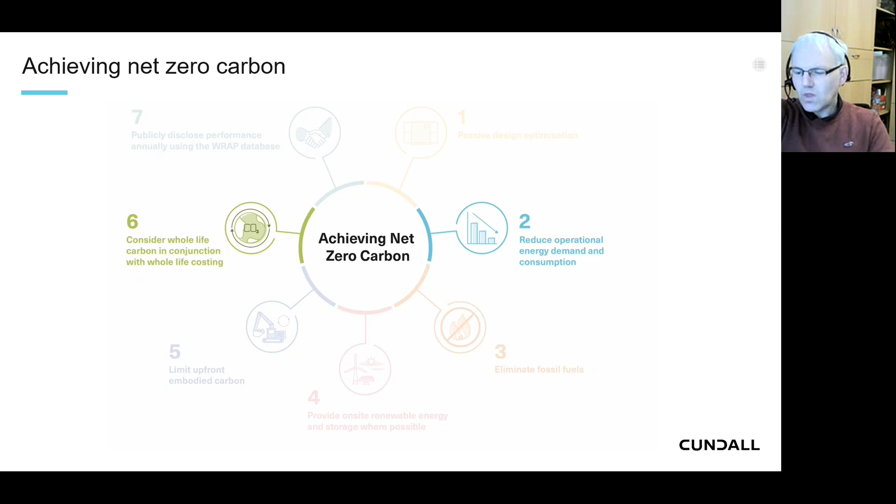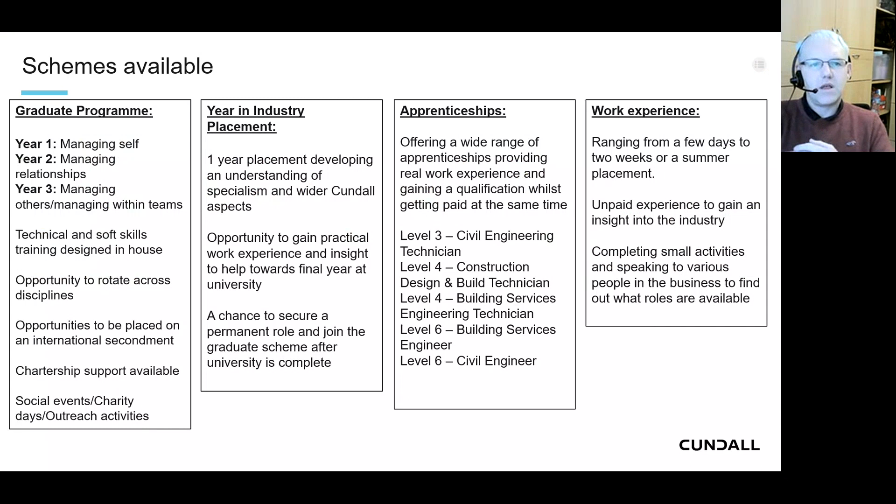As this is, I suppose, an opportunity to speak to some people that may be early in their careers, I just wanted to signpost you to a little bit of information about our early career schemes. So we operate graduate schemes, placements, apprentices, and work experience schemes. And if any of those are of interest, please do contact us through all the various channels. Our graduate applications go live in September of this year. We've currently got placement and apprenticeship processes ongoing at this moment in time. So if you think Cundall might be the place for you, please do reach out.

So the question really is, what is vertical transportation? Essentially it's quite a broad field, from lifts that help those in a wheelchair up 2 or 3 steps into a building, to the 10-meter-a-second lifts that take you up 300 plus meters in the Burj Khalifa, to great big industrial things that can lift massive weights, whether that be an HGV truck, a crane, or something similar.

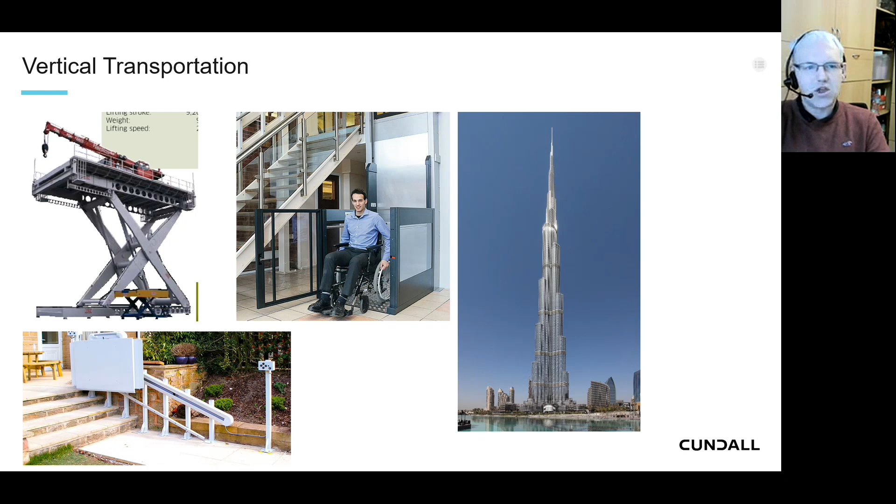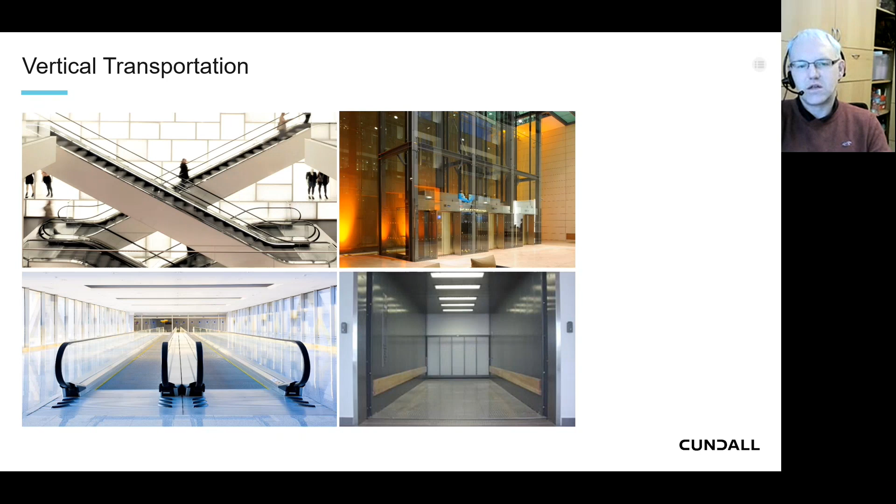But the main crux of it really is passenger lifts, goods lifts, escalators, and moving walkways or travelators.

So really, when we're involved in the vertical transportation field, we're often involved in the whole life of a building, from the initial conceptual planning stages through building design, working with other members of the design team, be that the other engineers, the architects, operators, through construction, and also in operation and maintenance of buildings and renewal and refurbishment. The typical lifespan of a building is around about 75 years.

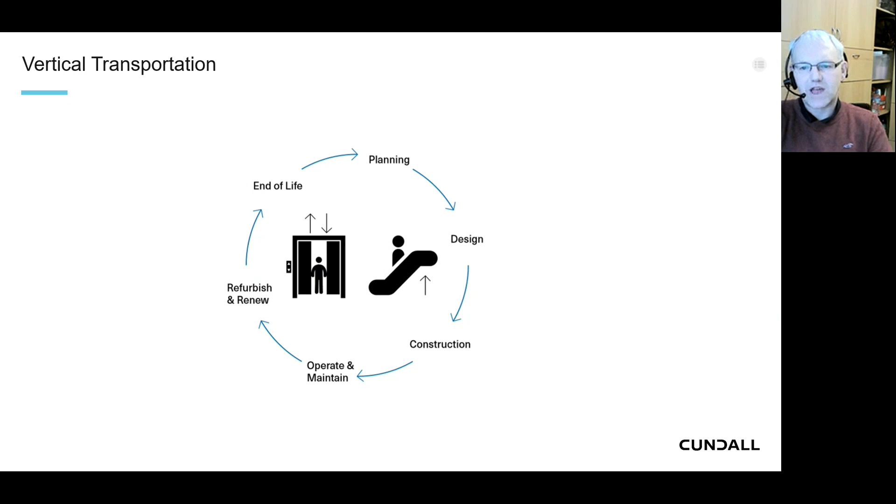Typical lifespan of vertical transportation equipment is normally around 20 to 25 years. So during the lifespan of a building, you tend to get at least 2 refurbishments of the vertical transportation assets just during the life of the building.

So looking at a little bit of terminology, because sometimes terminology can be confusing or misunderstood. Looking at a lift shaft in vertical section, there are 3 main areas that we talk about. The pit, which is the space below the bottom floor, typically something in the region of 1 meter to a couple of meters deep, and that's really related to the speed of the lift.

Then you have the travel, which is effectively from the lowest floor served to the highest floor served, the amount of distance that the lift actually travels vertically. And then above that top floor, there's a headroom space, which, dependent on design, will be something in the region of 3.5 to maybe 5.5 meters, and depending on the lift design, may have an amount of equipment within it or not, as we'll see in a couple of slides' time.

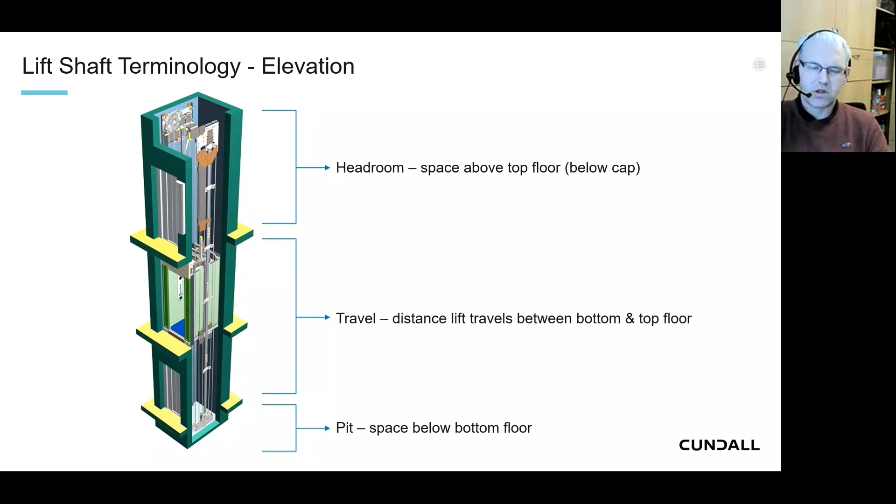Looking at things in plan, so over on the left, the lift shaft depth runs from the front wall to the rear wall. The lift shaft width runs from the left-hand side to the right-hand side wall, and it's amazing how many times in projects those dimensions get switched. So what's really important when looking at lift shaft design is that actually the depth and the width are in the right planes and in the right relationship to the doors.

You'll see there are a number of other key dimensions, but the one that I would always recommend people to keep an eye out for is that depth and width, and that it's in the right orientation to the doors when planning a building.

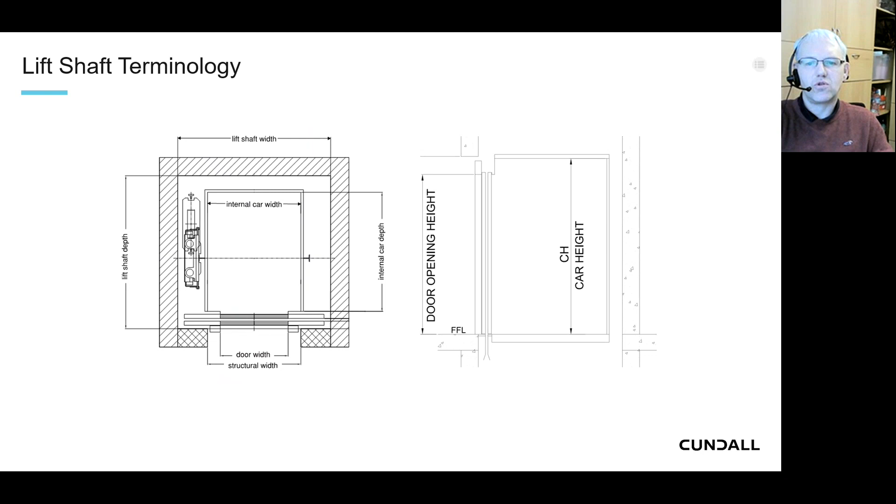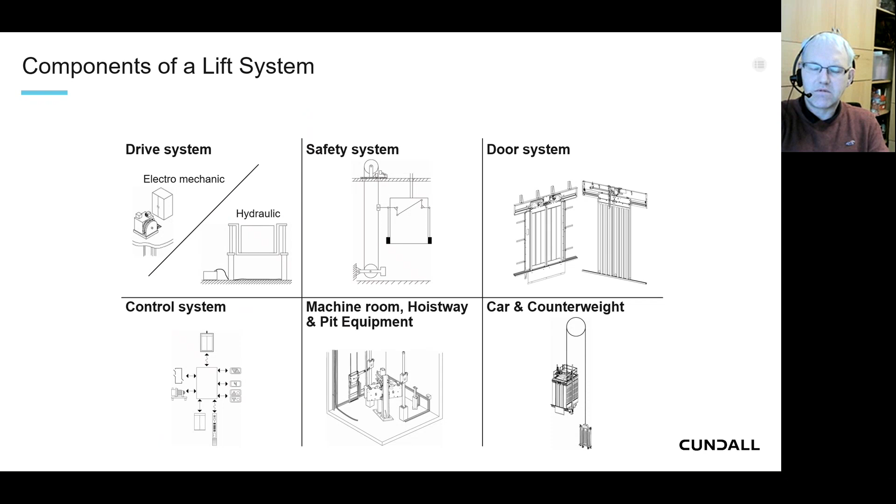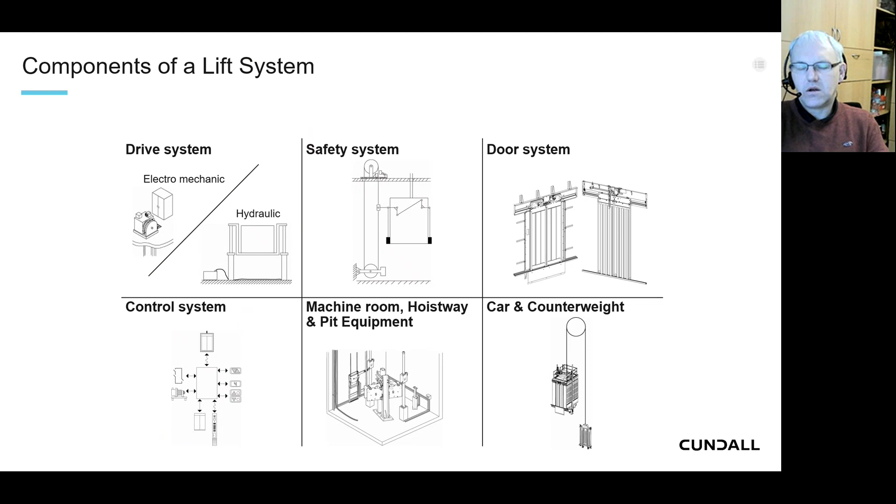So the variety of different components and elements of a lift system: drive systems, typically electrical or hydraulic, safety systems, door systems, control systems, and then the hoistway equipment and the car. In traction, electric traction lifts, you also have a counterbalance or counterweight, and really that's to reduce the energy used by the lift. So rather than, let's say, the weight of a lift car is 1,000 kilos and it's got 1,000 kilos in it, rather than lifting 2,000 kilos every time, there is a counterbalance to make it a more energy-efficient journey.

So typical kinds of lift system: in electric traction, you get a machine room above. That's the traditional arrangement, very prevalent up until the mid to late 90s. Now you will typically only see machine rooms on tall buildings or perhaps specific buildings where access to plant is important, like hospitals. The majority of lifts today will be machine roomless, meaning that they don't have a room on the roof for the machinery. All the machinery is within the lift shaft.

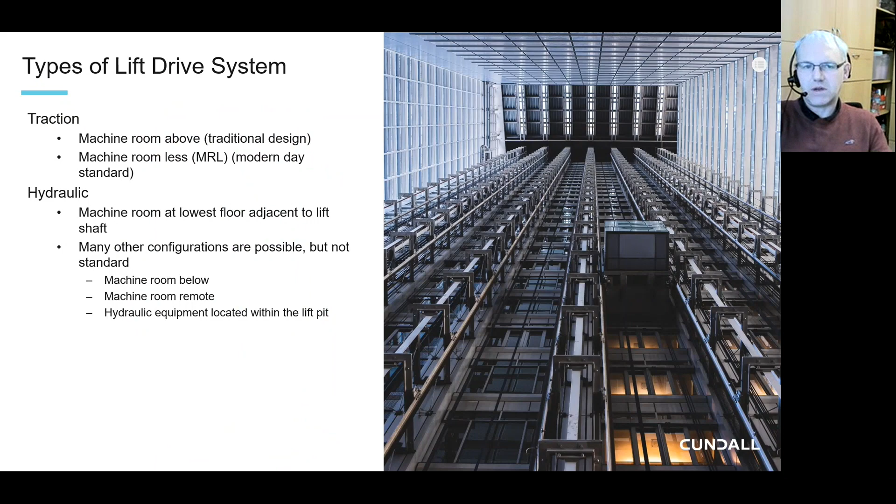And then hydraulics, effectively, I suppose the difference with a hydraulic is often the lift is being pushed up from underneath by hydraulic pressure, and so the machine rooms for a hydraulic lift are often at the lowest floor of a building. They can be in other places, they can be remote, but typically they would be at the lowest floor and next to the lift shaft.

Thinking about the application of different technologies, let's start with hydraulics. Hydraulics are perfect for slow speed but high weight or high load, so when you've got particularly large goods lifts, lifts for carrying cars, for carrying HGV trucks, things of that nature, over short distances typically, hydraulics are absolutely perfect. Large rated loads, simple construction, low speed.

Traction lifts, which are the electromechanical ones, are much more universally applicable, with speeds from 0.1 meter a second up to around 10 meters a second. Very large range of travel - the tallest lifts are up to around 500 meters tall in buildings now, with rated loads from a few hundred kg to maybe 10,000 kg. So in terms of applicability, the electric traction lift has got the widest range of application.

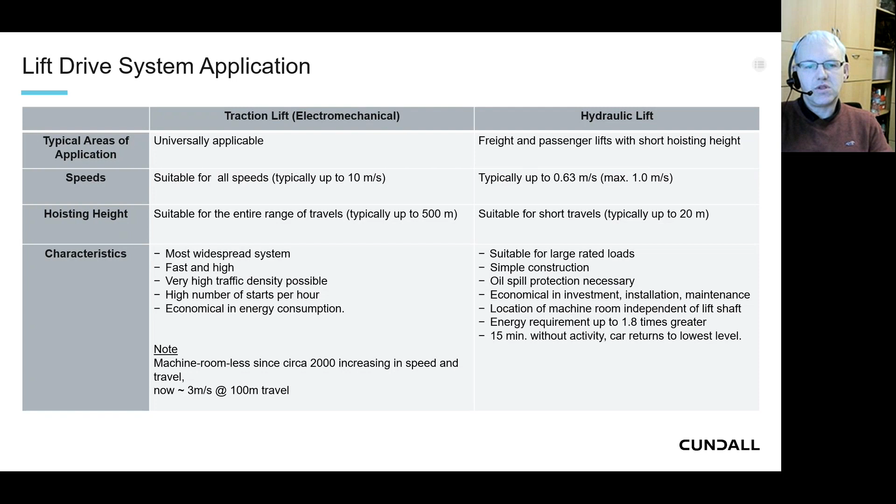Since around 2000, machine roomless lifts have become much more prevalent as the common solution for electric traction lifts. In the early days, that was quite restricted, maybe low speed, small lift cars. But now we've got machine roomless lifts of pretty much every size and shape, up to 3 meters a second, and over 100 meters of travel.

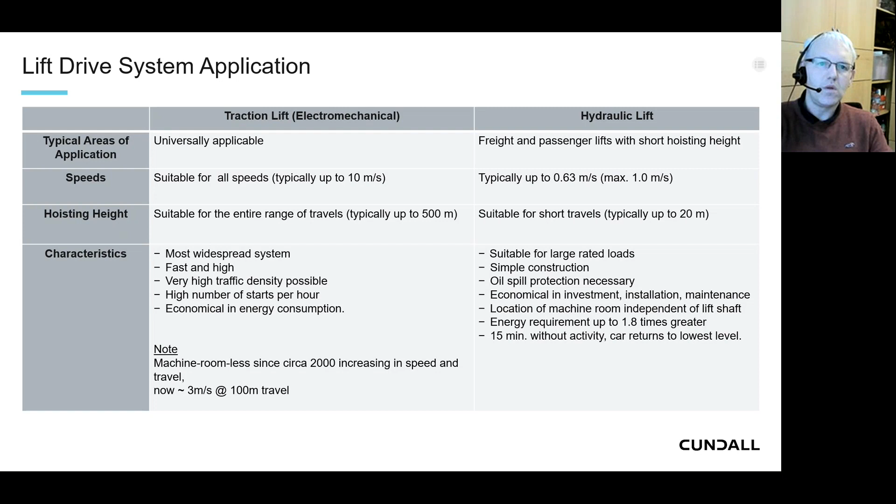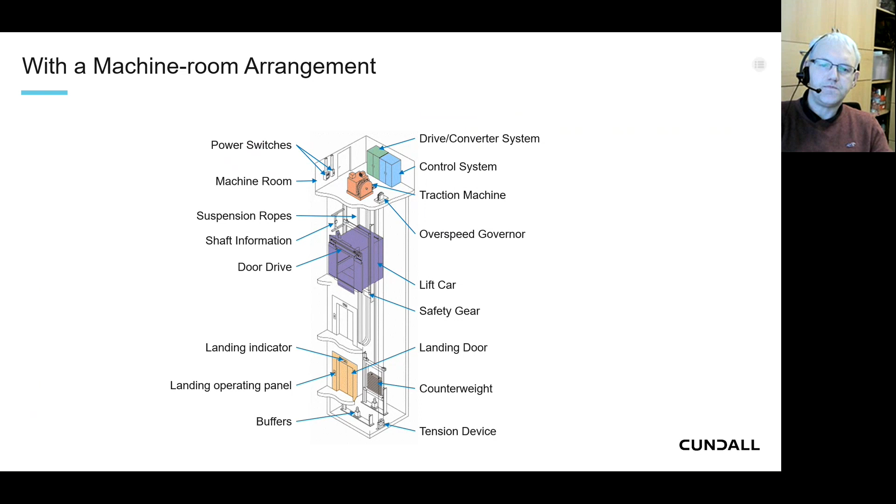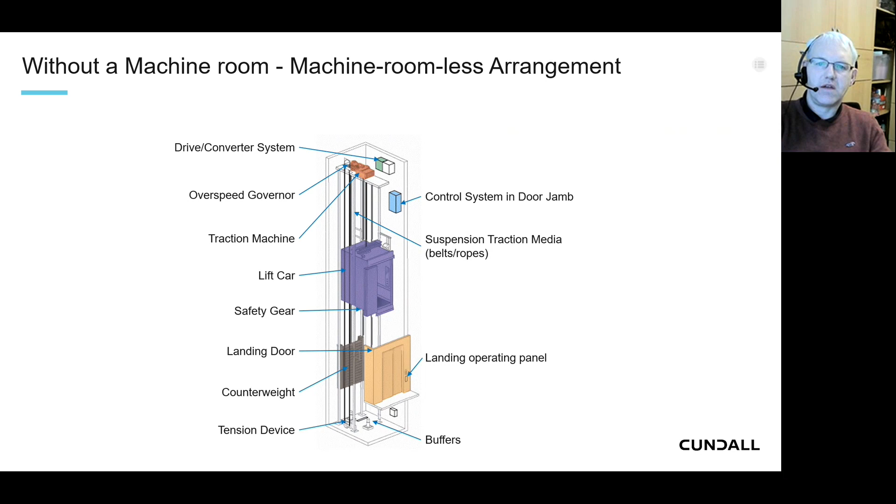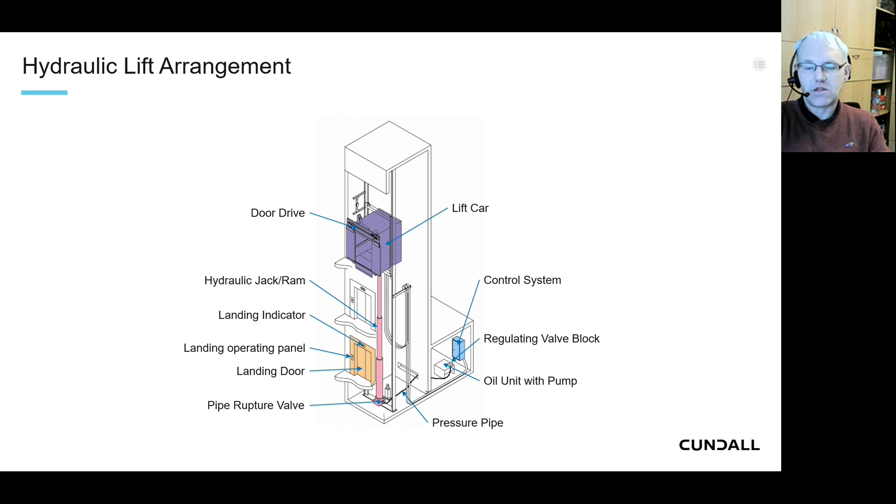Some of the things we need to think about when designing a lift system for a building are identifying and developing the design criteria. Often that'll be around how many people we need to move at peak times. For argument's sake, the volume of people using a lift in a busy office building is going to be an awful lot more than the volume of people using a lift in a car park.

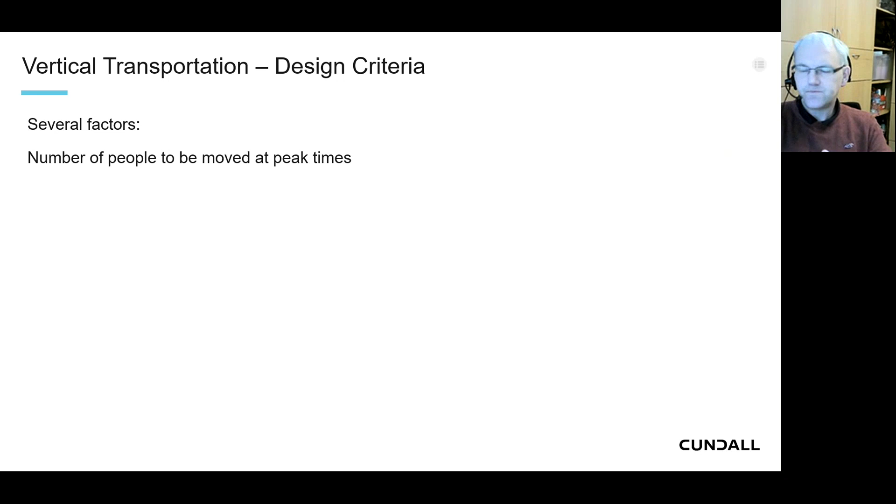Some of the key metrics that are also taken into account are things like waiting time and time to destination. Waiting time is the time that somebody would wait after pressing the lift button before the lift arrives. Time to destination is from getting into the lift car to effectively getting out. The level of performance that's acceptable to people is very much dependent on the environment.

In an office building, it's quite typical that waiting times would be less than 25 or 30 seconds as a maximum, whereas perhaps in a residential building, up to 55 seconds would be an acceptable waiting time, because there is a balance really between having enough lifts to move the people within the building, but not having that many lifts that actually you're building a building to house lifts.

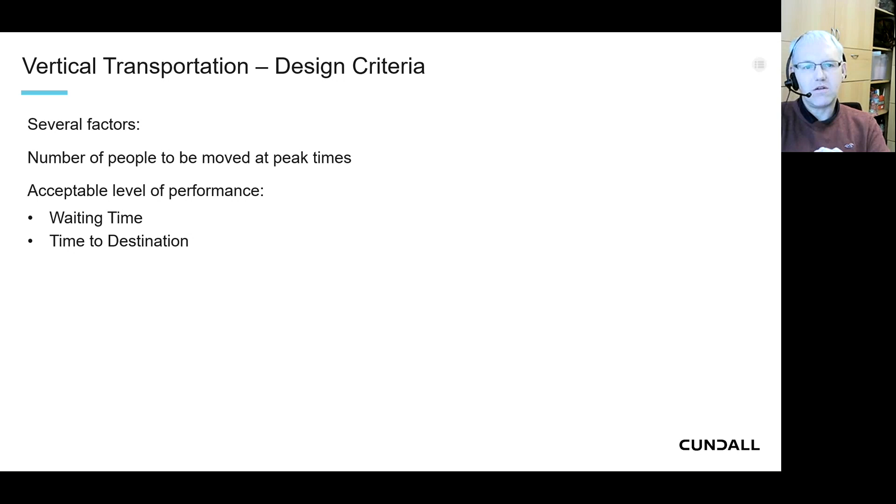You want some floor plate left. The purpose of a building is not really to house lifts, it's to house the people doing whatever they're doing on the different floors, whether that be offices or flats. So minimizing the footprint taken up by the lift shaft is key to the design development.

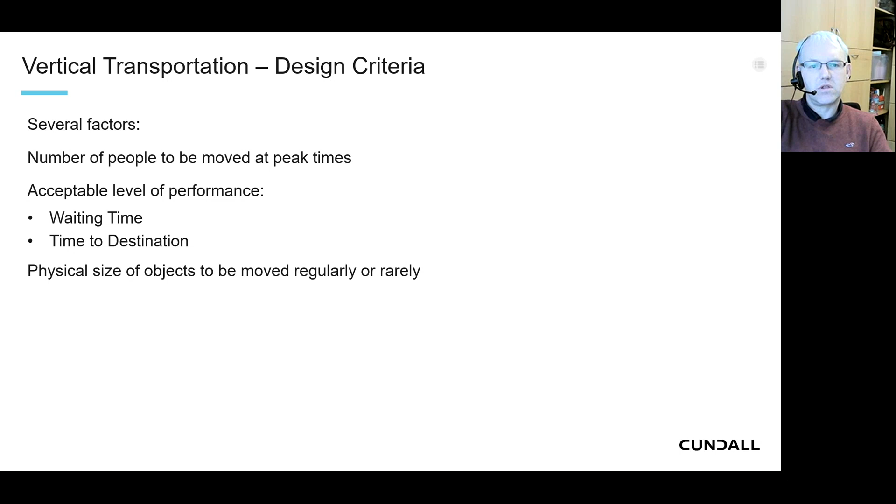Other things to take into consideration are the physical size of objects that are moved regularly. In residential, that might be furniture or deliveries, but also those things that are moved rarely. Quite often lifts will be part of the plant replacement strategy for a building. So if a generator is located on a particular floor and there's a potential that it needs to be removed or replaced using the lift every 10 years, then that lift needs to be suitably sized to take that irregular event.

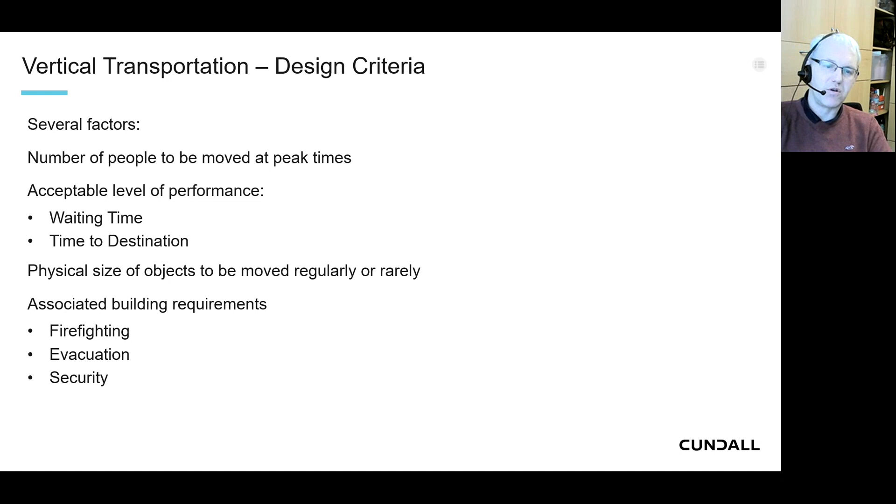The other elements that come into the design criteria for vertical transportation are around whether the lift will be used as part of the firefighting strategy - typically buildings over 18 meters tall in the UK would have firefighting lifts. Will the lift be used to help with the evacuation of people? Evacuation using lifts could apply to any building with a lift from 2 stories and above. And also, how will the lift interface with the security arrangements of the building? Is the lift itself some kind of preventative measure to stop people getting to and from certain floors?

The other major factor when thinking about lifts is accessibility. The building regulations Part M define the minimum requirements for accessibility of buildings, and they provide a diagram that details a lift that is 1400 deep by 1100 wide, so it's a 630 kg, 8-person lift.

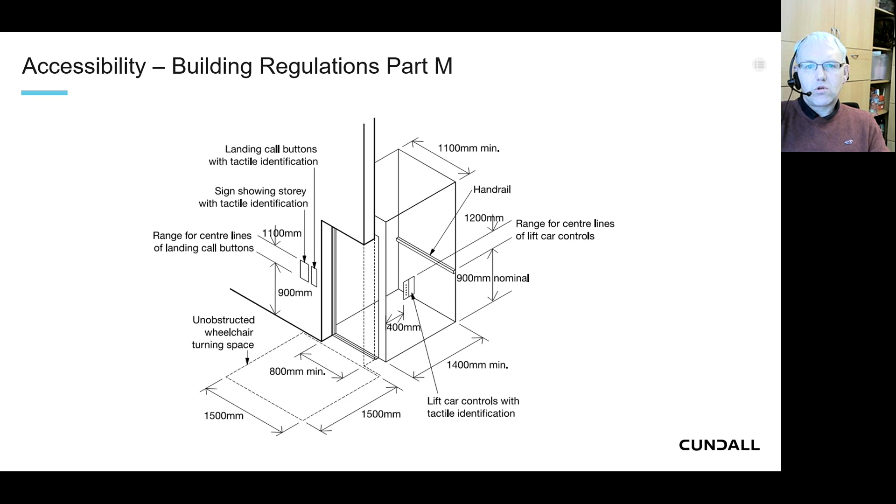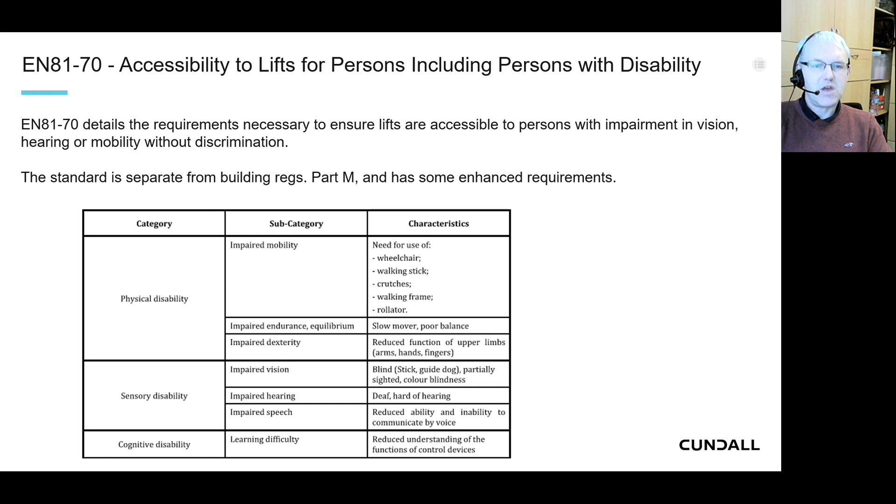One of the problems we see frequently is that this minimum requirement becomes the de facto standard. What's also relevant is a specific standard, EN 81-70, which relates to accessibility of lifts for persons with disability, and doesn't just consider individuals in a standard wheelchair—it looks at physical disabilities, sensory disabilities, cognitive issues, many different factors that have to be handled. Part M really needs to be seen as just the minimum standard.

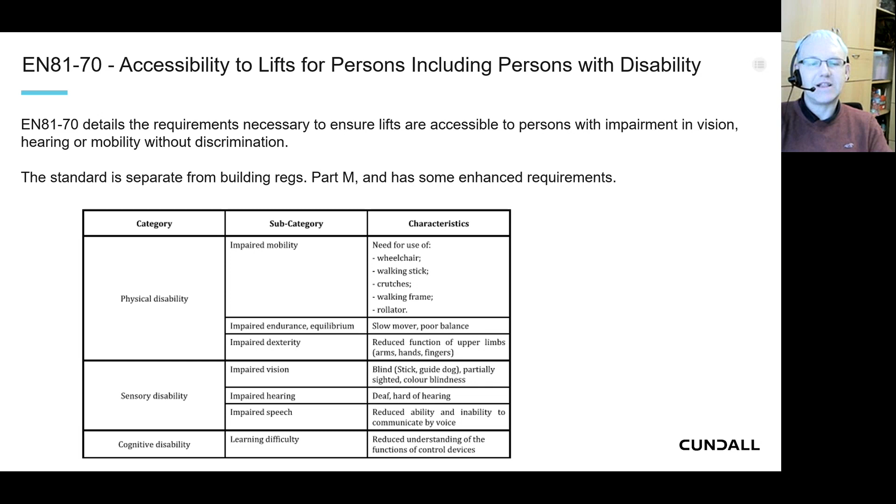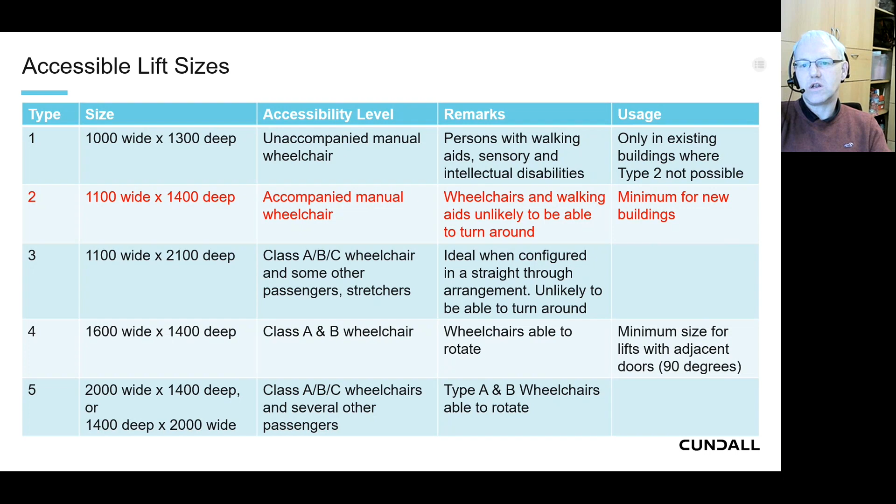Essentially, the Part M basic lift can accept an accompanied manual wheelchair. It's unlikely to accept people in an electric wheelchair, and definitely not able to accept people on stretchers. So when thinking about the design of lifts, Part M is a minimum requirement, but we need to think about how this lift will be used and how it will be accessible for all.

In more residential developments, or developments where you get a more aged mix of residents, motorized scooters are a key factor these days. Many residents will have motorized scooters and will want to get those scooters to their flats, or may even need to get to their flats on motorized scooters.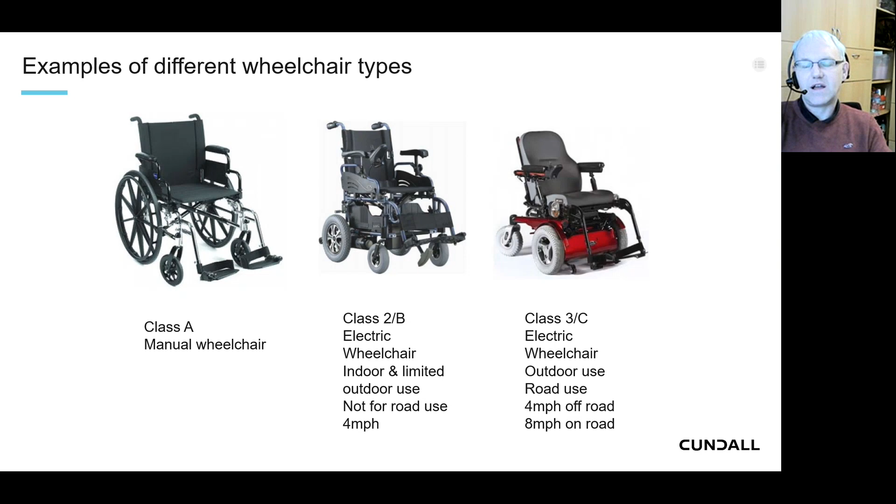Thinking now about lifts for evacuation and firefighter use, and some specific requirements around those: firefighting lifts have their own standard, which I won't go through in detail, but the key fundamental requirement is that they have a secondary power supply, typically a diesel generator. It's unlikely at the moment that a UPS solution can supply a firefighting lift, though I think we're moving towards that situation.

The alternative is that secondary power may come from an alternative power supply source to the main supply of the building. Firefighters lifts have basically two stages of operation. In the first stage, they return to the access floor to park and be available for the fire service. Then when the fire service arrives, there's a specific control mechanism that they use.

There's a minimum size for firefighting lifts, which coincidentally is also the minimum size we saw in relation to accessibility and Part M. But there's more and more call from the fire service that this minimum size is just too small, particularly for the kit they have to transfer if they need to evacuate injured parties on stretchers. So this minimum size very much needs to be seen as a minimum, and I think in the not too distant future we may see that changing.

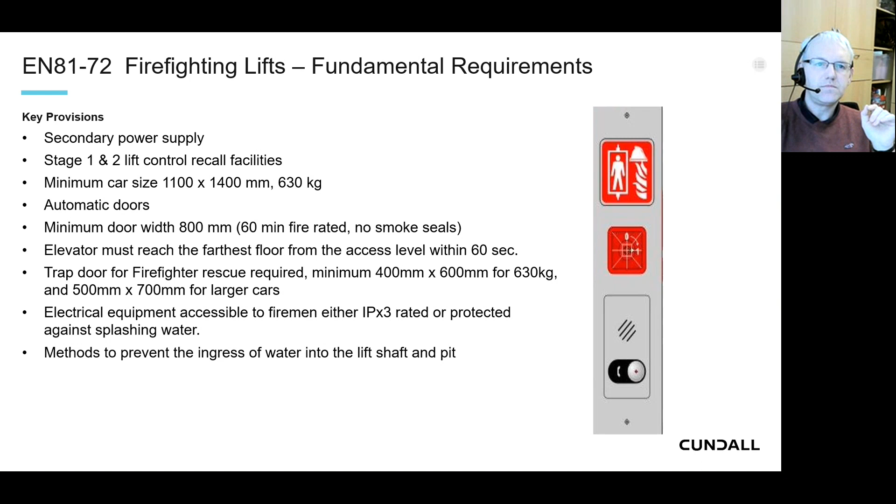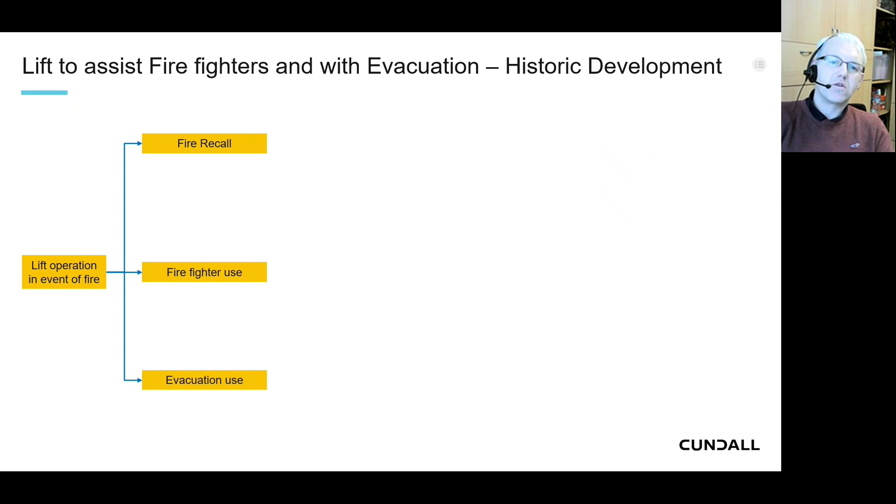So that was the standard for firefighters lifts, in place since around 2004. But for anybody involved in refurbishment of buildings, what we've got is a situation that's developed over many years since the first standards were issued in around the 60s. So we have a fire recall feature, which calls the lift down to the lowest floor, often either a manual switch, or today connected to the fire alarm and automatic. In aged buildings, you may have a switch adjacent to the lift effectively performing the function of a fire alarm connection.

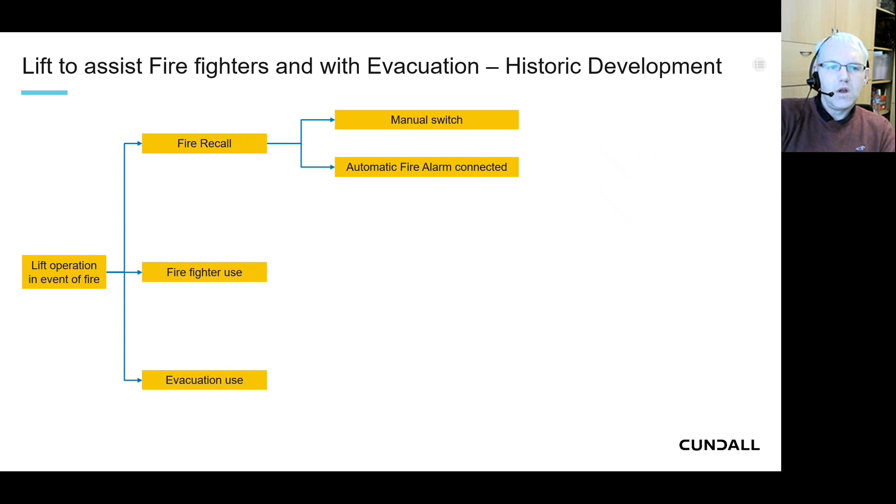You've also got lifts for firefighters' use - we've had firemen's lifts between the 70s and 80s, firefighting lifts between the 80s and early 2000s, and now firefighters lifts. The requirements or provisions of each of those different types of lifts is very different. So a fireman's lift from the 1980s is a very different lift to a firefighter's lift of the present day. If you're working in existing buildings, particularly when looking to upgrade or redevelop them, it's really important to understand what provisions are already there, and practically and feasibly what can be upgraded, what changes can be made.

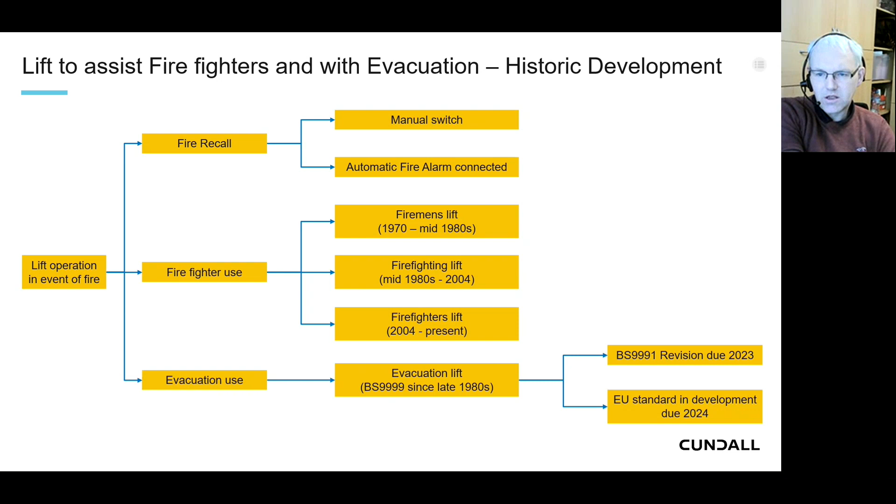And then evacuation lifts - these have existed as a thing since the 1980s and are defined in BS 9999. There is currently a revision of BS 9991, the fire safety standard for residential buildings, going through at the moment and due for publication later this year, which will likely change the requirements for evacuation lifts. In parallel to that, but not directly connected, there is also a European standard under development specifically for evacuation lifts, which would likely be implemented in the UK, even though we're no longer part of Europe.

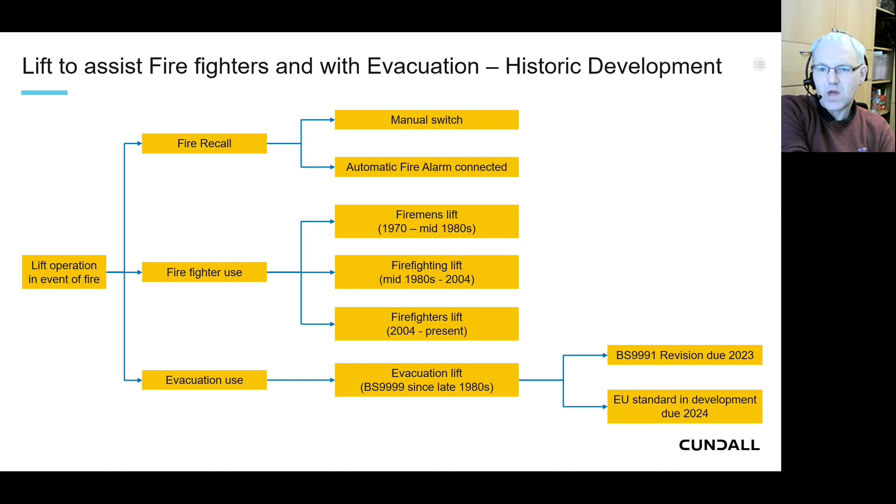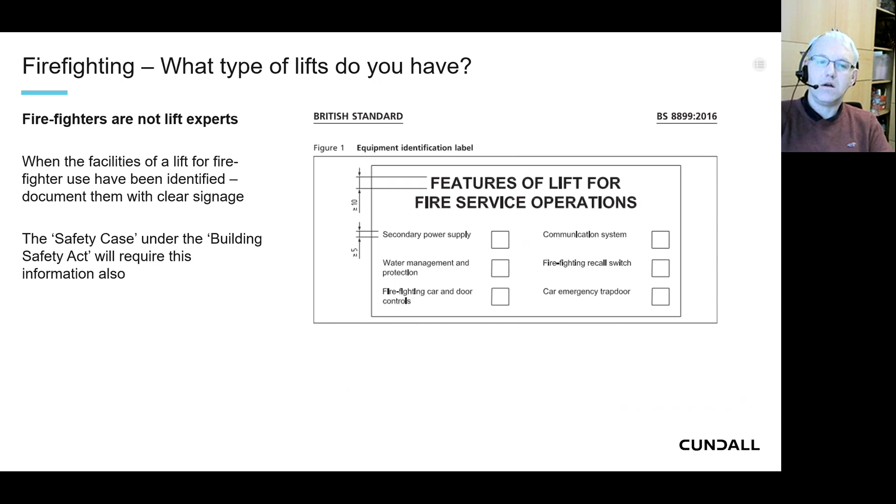One of the key things for existing buildings is actually understanding what type of firefighters lift there is, and in reality firefighters are not experts on lifts, and they don't know whether they've got a fireman's, a firefighter's, or a firefighting lift. So some really simple signage within building design is key, so that when firefighters arrive, they've got awareness of what this lift is, can I use it, is it safe, what features does it have. Under the Building Safety Act, this also forms part of the safety case for high risk buildings, so you're likely to see this more and more over the course of this year, as we see those safety cases being implemented.

In terms of evacuation lifts, I mentioned the standard they comply with earlier. They're quite similar to firefighting lifts, but not quite as complex. They have a secondary power supply, which may be a generator. You're more likely to see the potential of a UPS solution for an evacuation lift, primarily because an evacuation lift will be designed to perform a set number of evacuations, so the UPS can be sized to provide appropriate power and duration to meet that number of evacuations. You also have the potential of just a diverse routed supply from the same power intake, so that if the primary supply failed, you've got a diverse routed supply through a fire protected enclosure providing that secondary power. So it's a little bit simpler.

There's an evacuation switch at the main exit that puts it into an evacuation mode, similar to firefighting lifts, which have a firefighter's switch putting it into firefighter's mode. And there's a communication system, also similar but slightly different from a firefighter's lift. I think the key thing with evacuation lifts under the current regulations is that using the lift to evacuate people is a managed evacuation. Typically, what does that mean? If you've got a person due to be evacuated from an upper floor, there will be an evacuation management team of at least 2 people, one of whom will stay at the main floor to effectively control the evacuation.

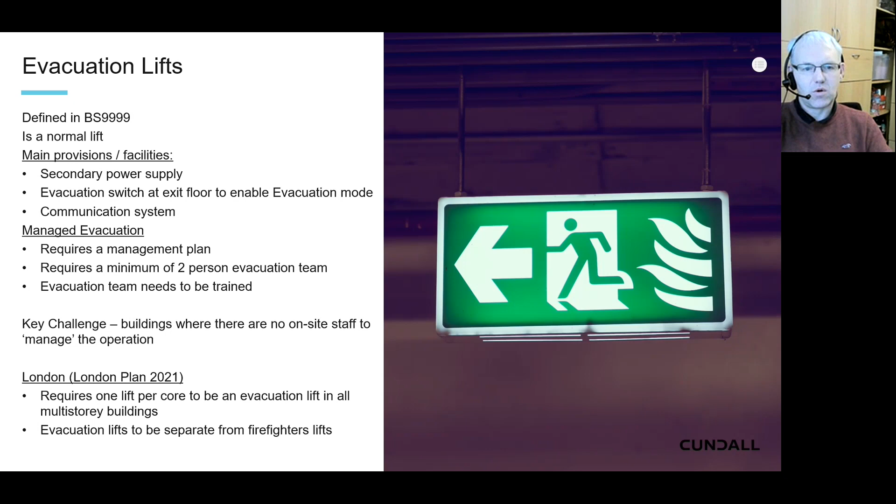You may or may not be aware that the Fire Safety England regulations, ratified in 2022, came into effect about 5 or 6 weeks ago. They relate to existing buildings in England, bringing in a regime of testing and inspecting lifts provided for use by the fire service or for evacuation. So there's now a requirement for building owners and operators with firefighters' lifts or evacuation lifts to notify the local fire service if that lift is broken down or unavailable for more than 24 hours, and also that it's regularly maintained, inspected, and that records are kept.

Moving on now into lift emergency communications. Since the late 90s, new lifts have needed the ability for a trapped passenger to contact a rescue service. Generally this is termed an auto dialer because it does all the dialing by itself. Long gone are the days where there was a physical telephone within a lift. It's a hands-free communication device that should automatically connect to a rescue service.

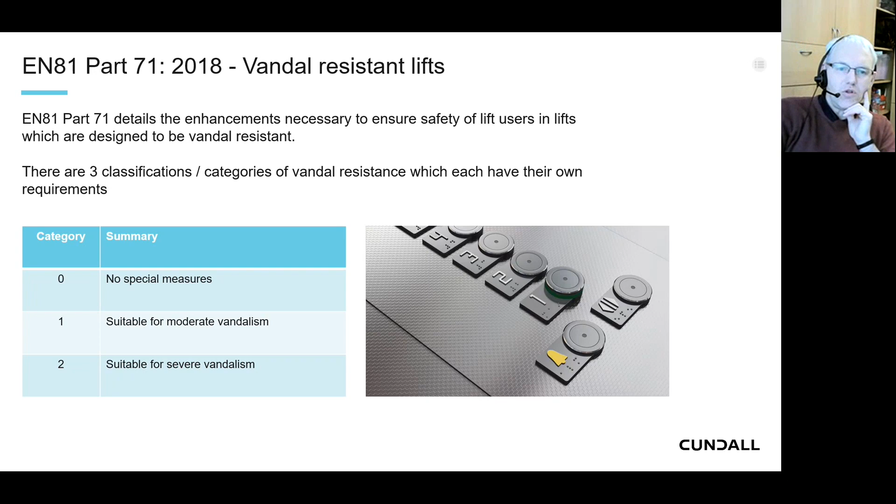For example, category 2 is likely to be seen in public areas that are open to vandalism. Category 1 may be seen in perhaps schools or universities, where it's not necessarily vandalism, but maybe misuse or over-exertion use, not direct vandalism and attack.

So just thinking about how vertical transportation works as part of the wider design team for buildings, we interface between lots of different disciplines. The lifts within a building typically move between all floors. We're involved with the architectural team and the architect, whether that be around finishes inside the lift car, also the doors and around the lift doors, but also in terms of user interfaces and visual alignments.

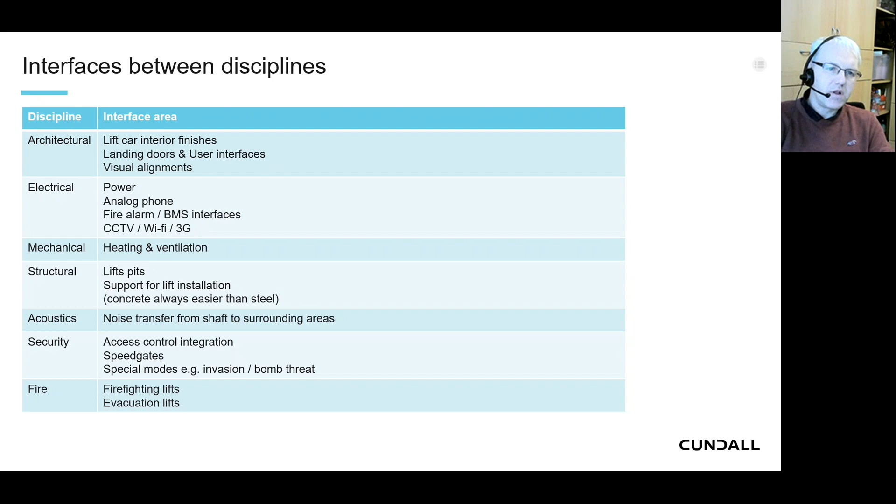From an electrical engineer's perspective, we're often interfacing with them around power requirements, previously analog phone lines, now typically GSM phone lines, fire alarm and BMS interfaces, and things like CCTV, Wi-Fi coverage, etc. The mechanical engineers, that's really around heating and ventilation, whether that be for the machine rooms themselves, if there's a machine room, or also for the lift shaft.

There's a requirement that the lift equipment is maintained between extremes of plus 5 and plus 40 degrees, so that may in some cases need ventilation to be provided, or indeed heating.

Often we interface with structural engineers around the lift pits and the lift shaft itself, and with the acousticians around noise transfer from the shaft to surrounding areas, particularly prevalent in residential developments or hotel developments, where you've got bedrooms close to the lift shaft and you want to make sure the noise of the lift operating is not transferred through the lift shaft into those sleeping areas.

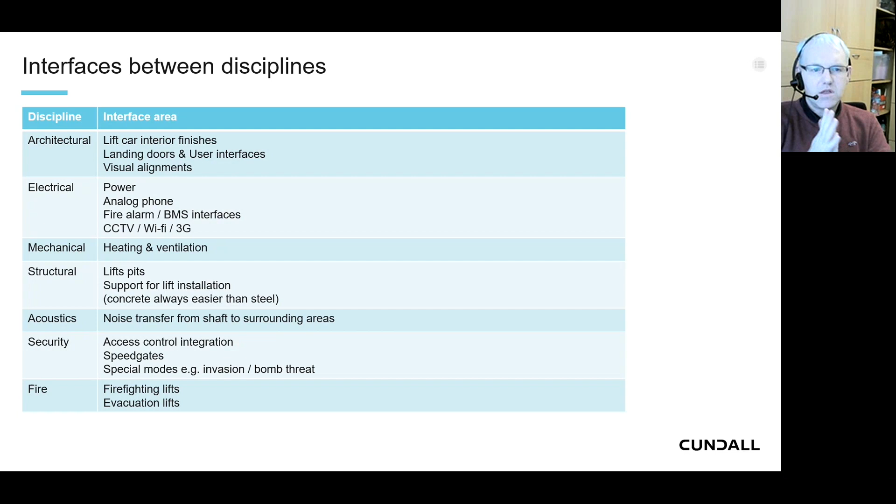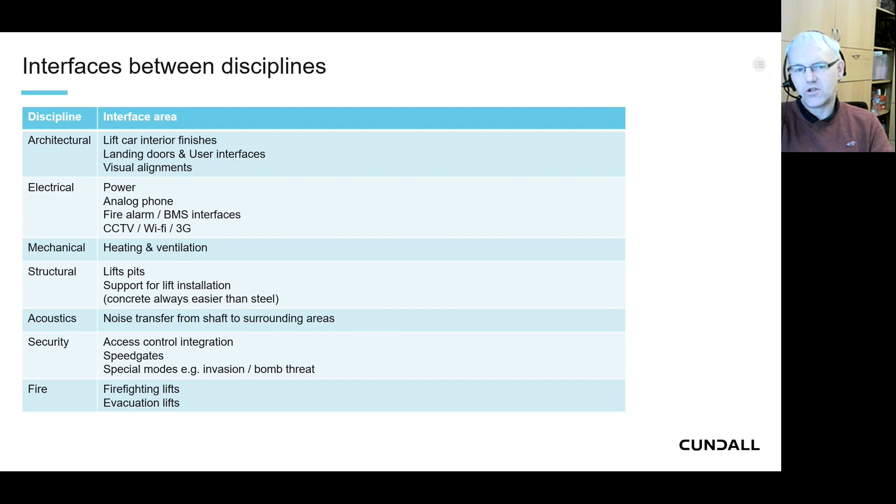We interface with the security consultants around access control integrations, speed gates, special modes and features. For example, some buildings may have invasion controls or bomb threat controls. And then with the fire engineers around firefighting lifts and evacuation lifts.

So just on the topic of lift shaft ventilation, because it's something that quite often gets misunderstood - the lift shaft ventilation is the responsibility of the building designer. That's a bit of a vague thing really, so what that really means is it's a team effort, typically between the lift consultant and the mechanical engineer.

At the concept design stage, the requirements of the selected lift contractor are not known, so you basically need to assume there's going to be a need for some form of ventilation. Then once the lift contractor is selected, they will provide the heat output of their specific equipment, and that will then enable the mechanical engineers to determine whether ventilation is required or not.

Thinking back to what we were saying right at the beginning about our move to net zero, and also keeping heat within buildings, the days of fixed ventilation louvers that just let the heat escape out of the building whilst keeping the lift shaft cool are probably disappearing. We now want to be looking at some kind of intelligent ventilation for lift shafts that only opens and lets heat escape when the temperature rises above a certain threshold, so that we're not losing heat from the building unnecessarily.

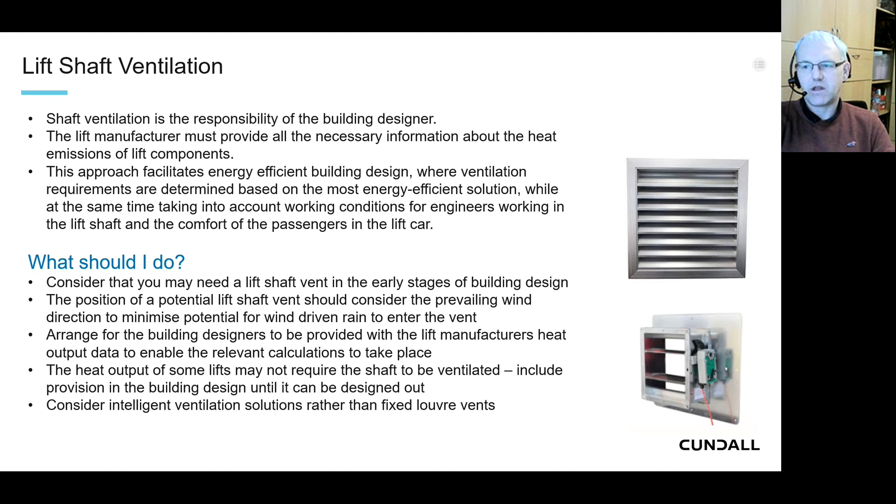So just as we move towards the back end of the presentation, a couple of thoughts on common issues in VT design that we experience on a regular basis. Quite often employers' requirements really just document a minimum, and that is then taken as the requirement. There really needs to be a level of thought that goes into whether the minimum is suitable for this project, for this building usage.

We mentioned already about the accessibility requirements - also, do those requirements fit with the operational requirements of the building? Minimum size of a lift doesn't necessarily provide accessibility for all, but also the minimum size of a lift, being an 8-person, doesn't provide a great deal of space for moving things. So particularly in residential buildings, if you need to be able to move furniture in, fridges, bicycles, you need a lift that is suitably sized to accept that equipment.

If the lift is too small, the reality is that people are going to find a way to fit a fridge freezer into a lift. They might just damage the lift on the way in or out. So making sure it's appropriate for its use will result in the lift having the expected lifespan, and not being damaged through misuse because it's been incorrectly sized.

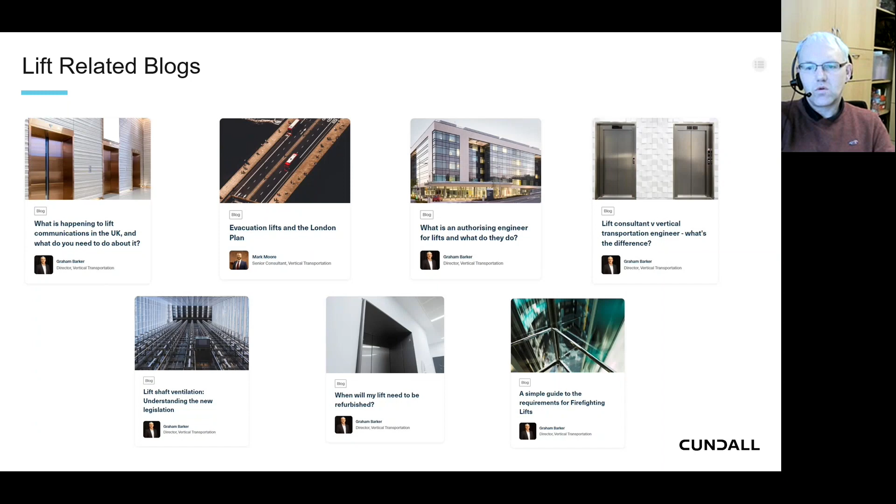As we come to the close, I'd just like to thank everybody for their involvement, and really open the floor up to any questions that anybody may have following today's presentation.

Thanks very much, Graham. Thanks for that very comprehensive presentation. So there's a series of questions. The first question is from Praktar Hatwell - I hope I'm pronouncing that name right. How are the electrical systems cabling done for lift cars?

So there's what's called a traveling cable or trailing cable. Effectively, the lift has a cable that is fixed at a high point within the shaft and then fixed to the lift car, and is draped in a loop. It's a special type of cable that travels up and down with the lift. There's a slight change to that coming because with something called TESREL, which is basically Wi-Fi enabled safety circuits, shall we say, the future is perhaps cableless, but we're still a little bit away from that point arriving.